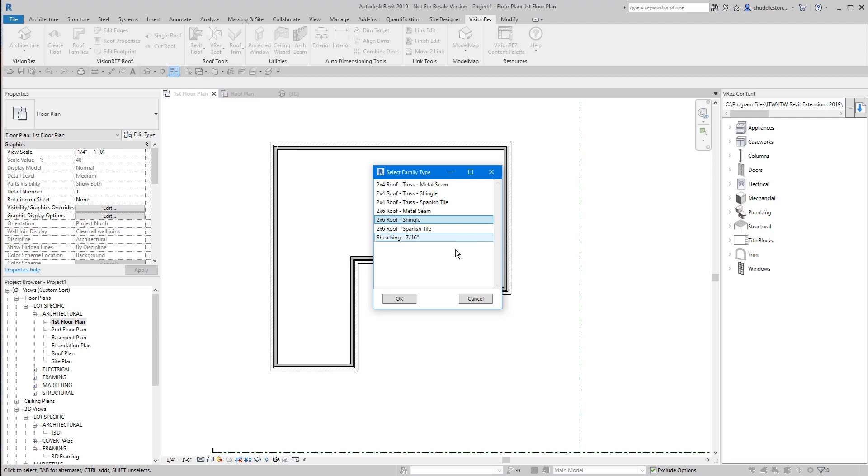We already have inserted walls. The first thing we need to do is pick a family style, so we're going to do select family, and we're going to pick 2x6 roof shingle. Side note, if you do have other roofs inside of your template, they will populate in this window.

I'm going to say OK from here, and I'm going to take a look at the properties of this, or maybe I need to change some of the properties. So we have a button called Edit Family, and it will tell you what family that you're using.

It brings up a dialog box that gives you a lot of different things you can do with this roof. You can change the plates, you can change the pitch, overhang, rake overhang, end conditions, from plumb, square, two-cut plumb is what we typically use, and two-cut square.

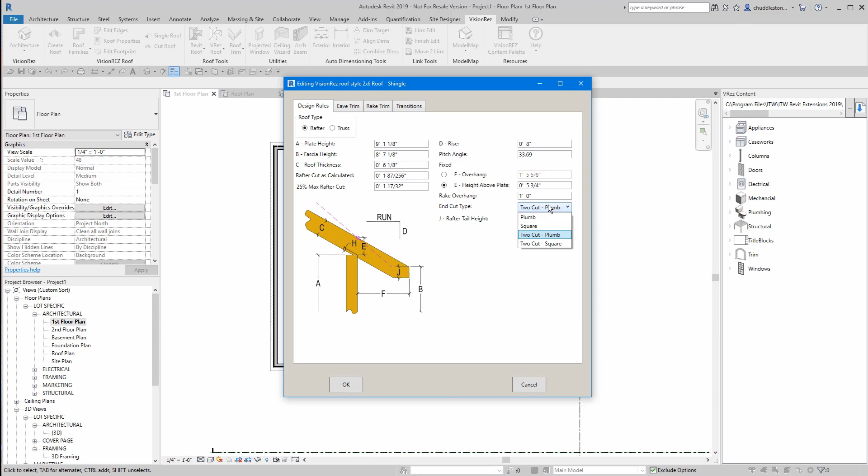You can also change this to a truss roof. So if you decided in the middle, hey, I need to change this, we can go ahead and change this to a truss. Now this is only on the first run. You can't go back and try to edit this and turn it into a truss. This is just our beginning setup.

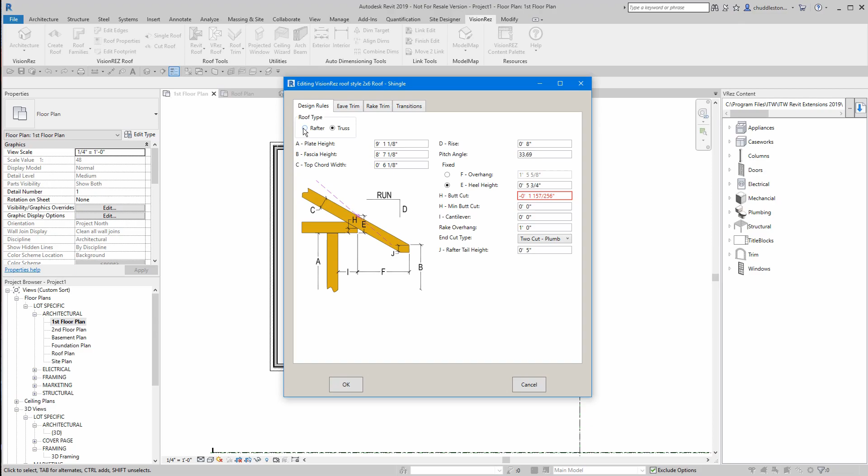So I'm going to switch back to rafter and touch on the other tabs. We have eave trim located there. And because this does have brick, we have a stud offset of 5.5 inches for that brick, so it'll sit on the outside.

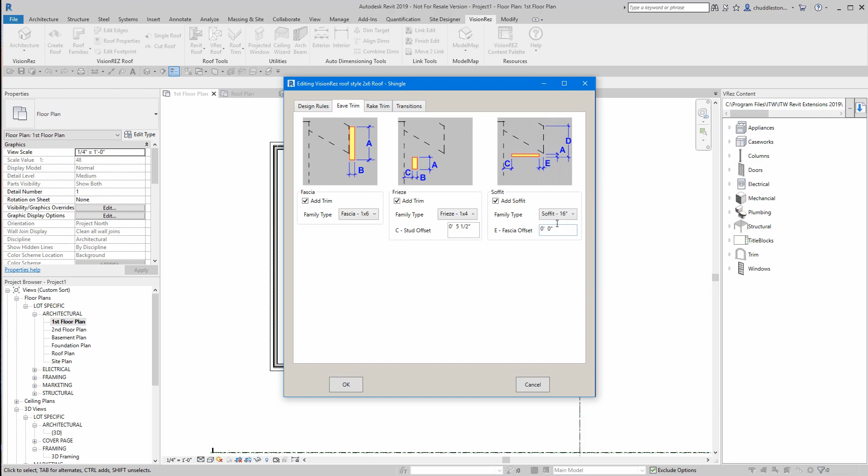On our soffit, I'm putting a 16-inch. Actually, I have a 15-inch and 3/4 overhang, but 16-inch will work. Rake trim, same items. We'll put fascia, frieze, and soffit. We're going to have a 12-inch soffit there.

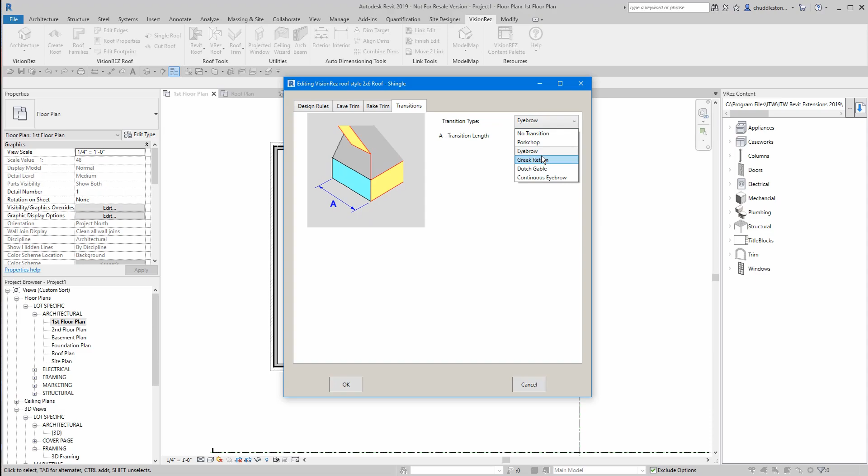Transitions, we're going to use a pork chop, and we're going to do it at 1'6" on that A dimension. The other ones that we do have are eyebrow, Greek return, Dutch gable, and continuous eyebrow. For this, we're just going to do pork chop.

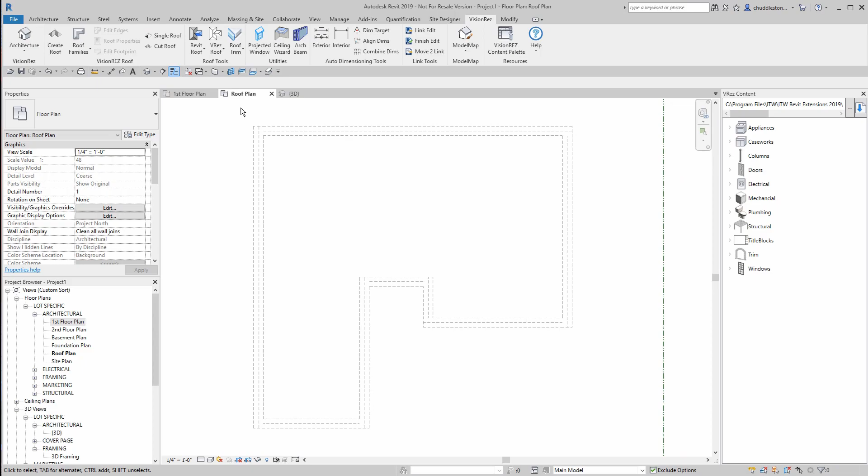I'm happy with all my settings, so I'm going to say OK. And I'm going to switch to my roof plan so I can see my roof populate when I create it. I'm going to select all my walls and do create roof.

I want to always put my roof on my first floor because it will tell me the height of the plate when we get started. If you put it on your first floor plate, it will tell you how tall it is from the first floor plate, so it actually will say 0. You'll see what I mean here in just a second. So I'm going to say OK so I can populate my roof.

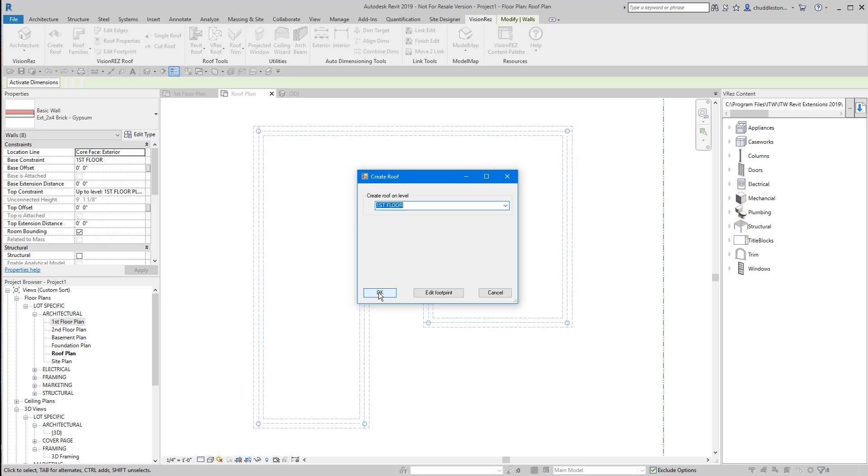Our roof is created. Let's take a look at it in 3D real quick. Just plain and simple, it has the trim on it. And we can do some modifications.

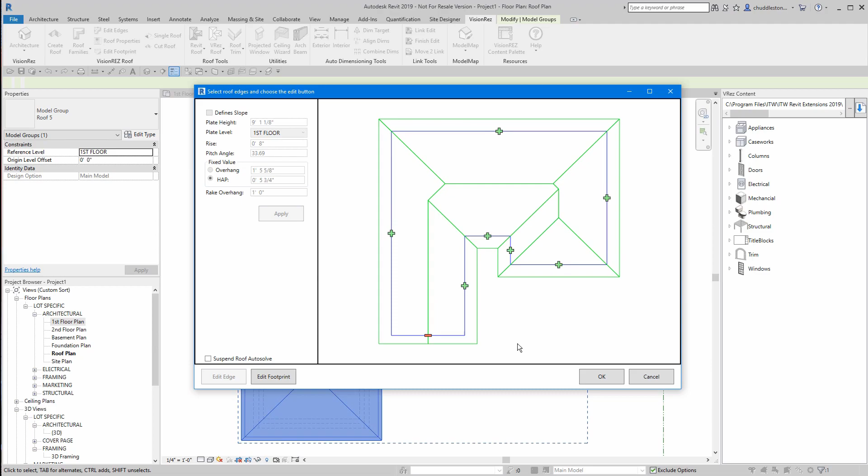So I'm going to go to the roof plan, and let's make some changes. We're going to use the edit edges. So I'm going to pick this roof, and I'm going to use the edit edge button. I can turn, all these pluses are hips. So if you just hover over the plus, it turns into a minus, and it turns into a gable. So if I'm happy with my settings, I can say OK.

And then to take a look at that in 3D, you notice that it did in fact make those changes and it put those pork chops in there correctly.